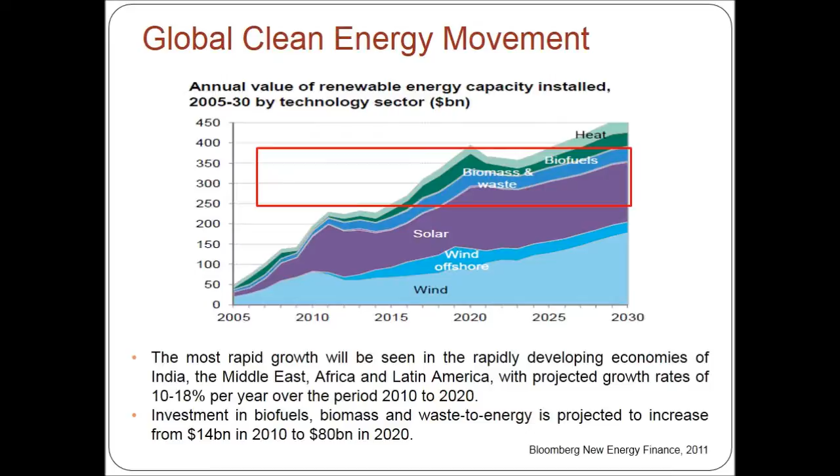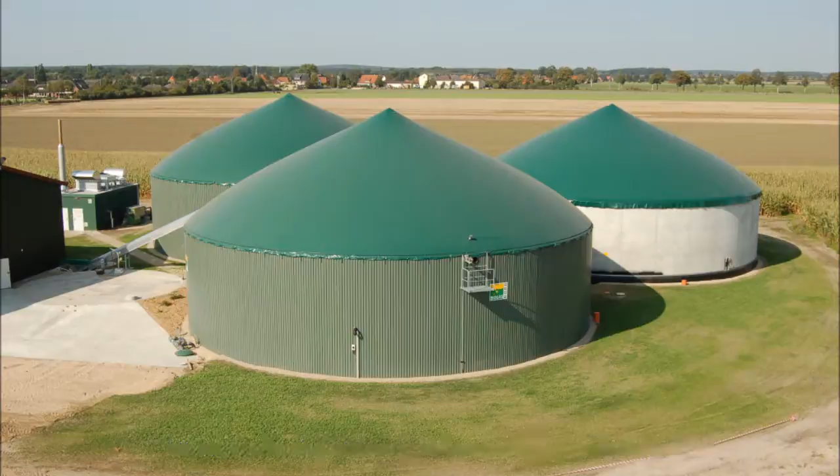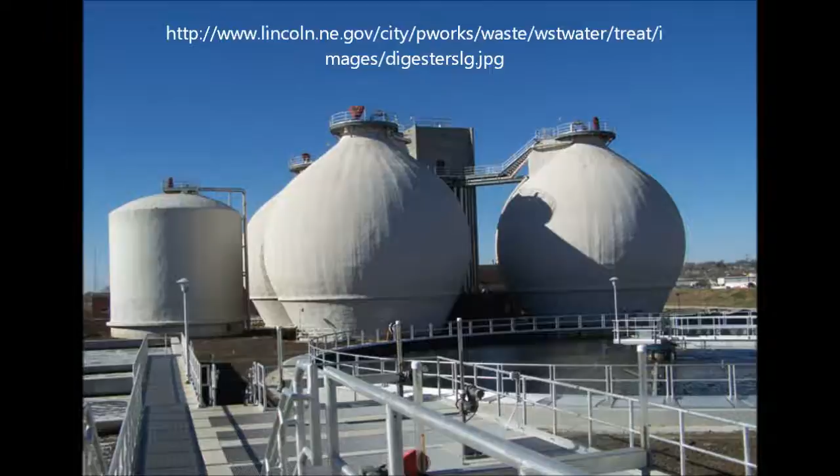The biological waste-to-energy technology known as anaerobic digestion is one of these clean energy technologies that has found success on many different scales, whether we range from small-scale systems on rural farms in the global north or even the global south, to even larger-scale centralized systems that are in process recovering resources from many different kinds of waste streams. But first, let's talk a little bit more about anaerobic digestion.

Anaerobic digestion is a process in which microorganisms stabilize and degrade organic material under anaerobic conditions. Biogas, stabilized biosolids, and liquid waste are the main byproducts of the process. Anaerobic digestion is a natural process that occurs in living things and in soils and sediments as microorganisms that favor anaerobic conditions degrade organic matter.

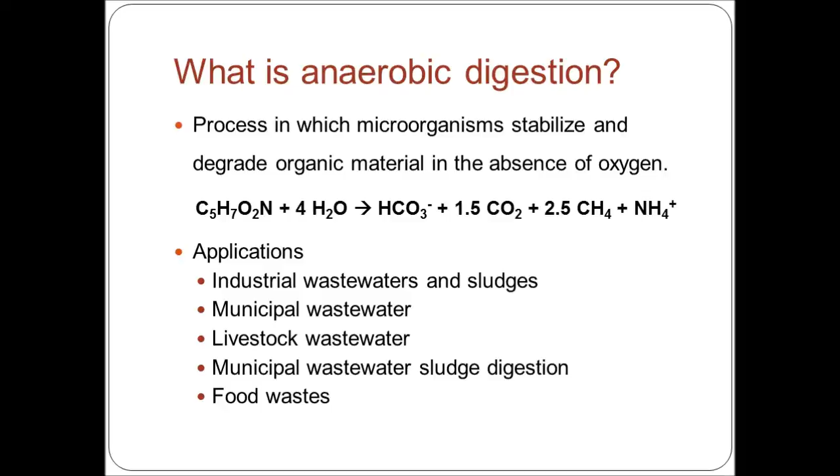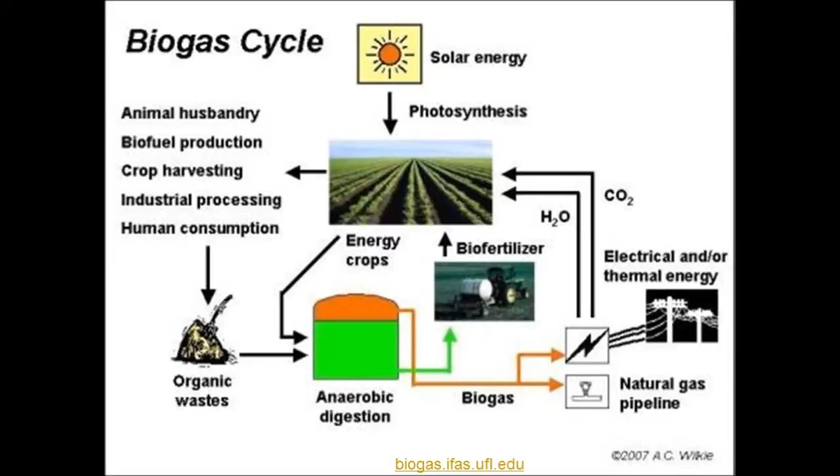Engineered anaerobic treatment processes can be used to treat industrial wastewater, municipal wastewater, livestock wastewater, and food waste. The biogas produced during anaerobic digestion can be transformed into electricity or distributed into the natural gas pipeline. The biosolids produced from the process can be used as a soil amendment, therefore contributing to the biogas cycle.

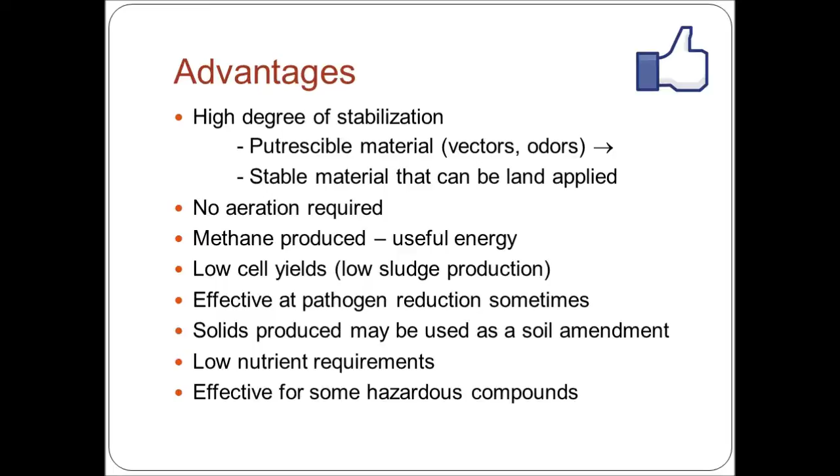Compared to other treatment processes such as aerobic treatment, anaerobic digestion produces a stabilized effluent that can be used as a soil amendment. Anaerobic digestion does not require aeration and thus reduces cost. This system produces energy and has low biomass production. In addition, anaerobic digestion microbes have low nutrient requirements and can effectively treat hazardous compounds.

Anaerobic digestion does, however, have some disadvantages. Anaerobic digestion requires different groups of microbes that require different temperatures, pH, and operating parameters. Methanogens, biogas-producing microbes, are sensitive and slow-growing. Corrosive gases such as hydrogen sulfide can also be formed, and the effluent needs further treatment due to production of ammonia.

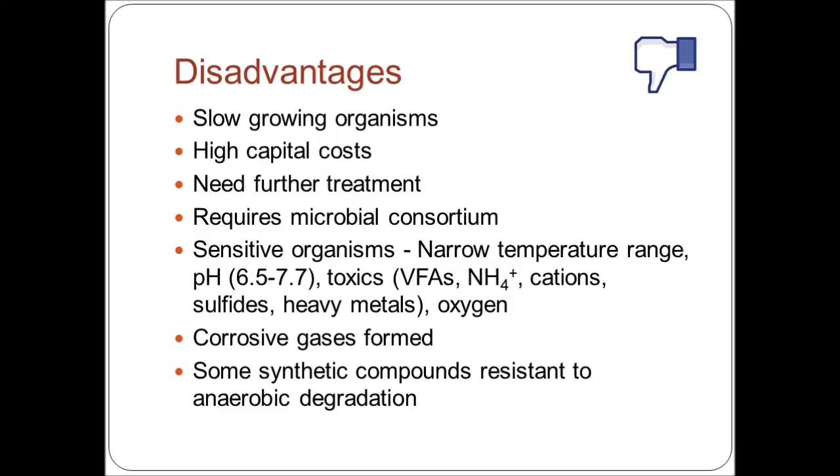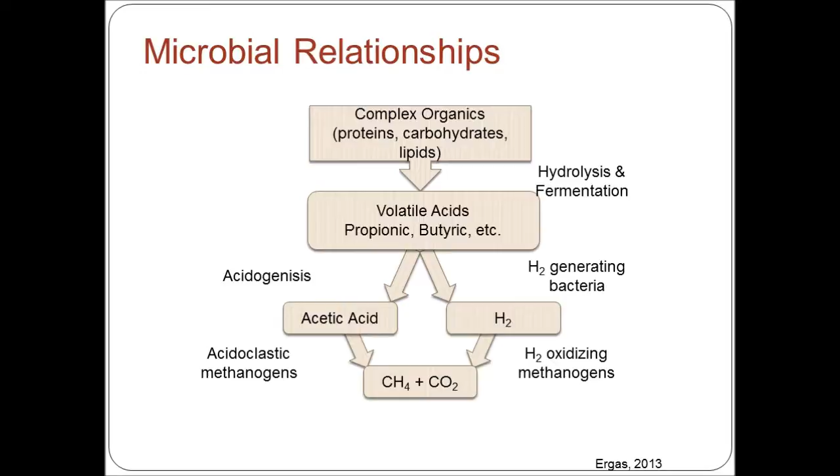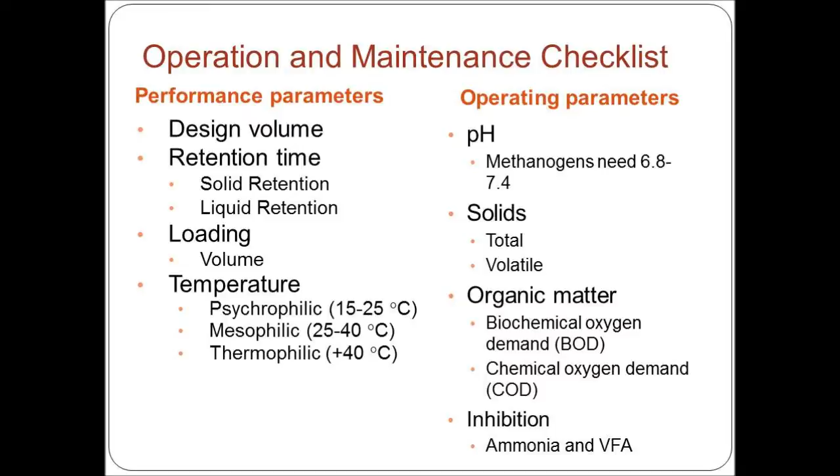Within the developed world context of anaerobic digestion systems, there are several scales that can be evaluated to better understand how anaerobic digestion works. Ideally, no matter the scale of your anaerobic digestion system, there are certain performance and operation parameters that are considered on all levels in order to ensure a well-functioning system. Here at the University of South Florida, we are operating both pilot scale and bench scale systems in order to understand how these anaerobic digesters function.

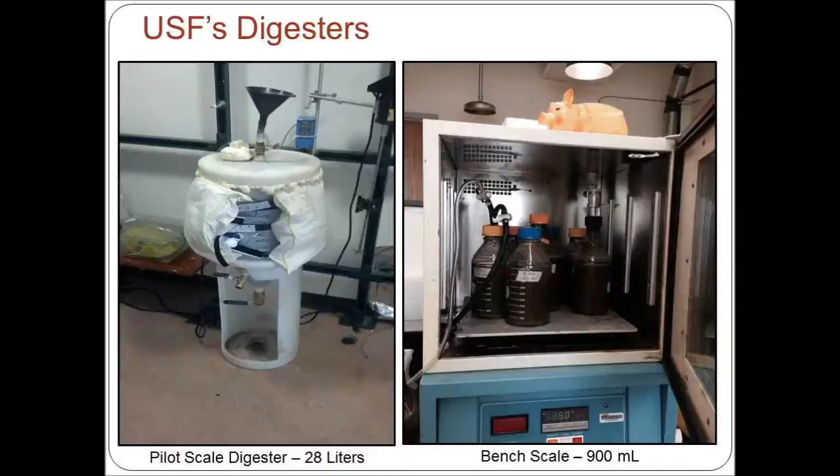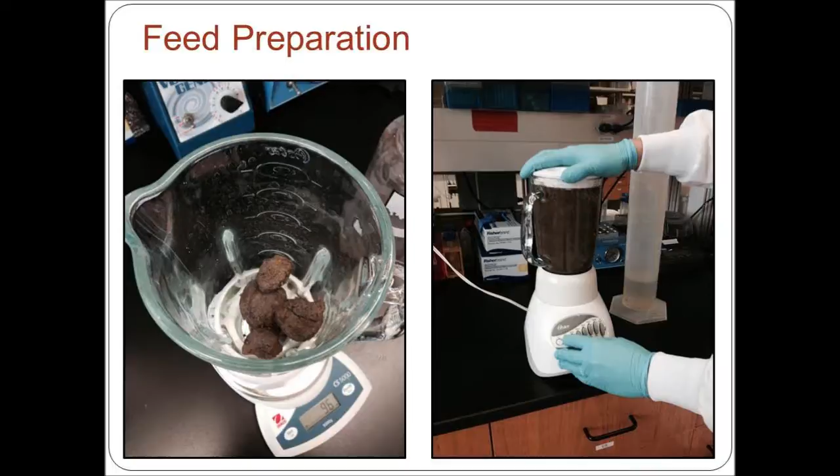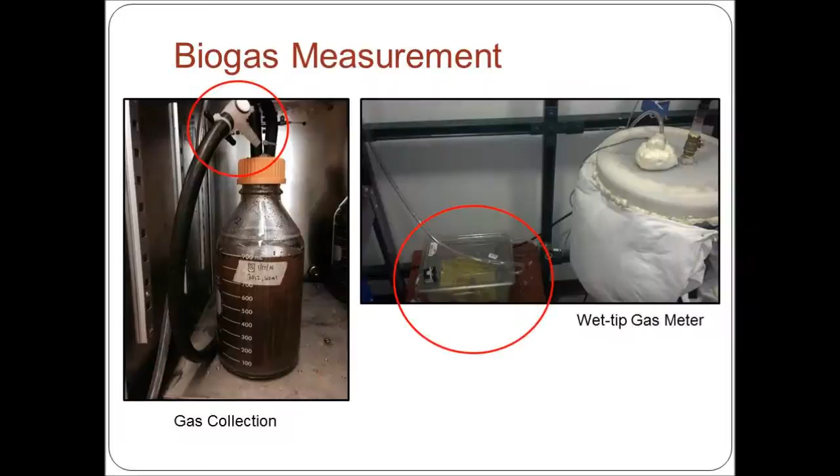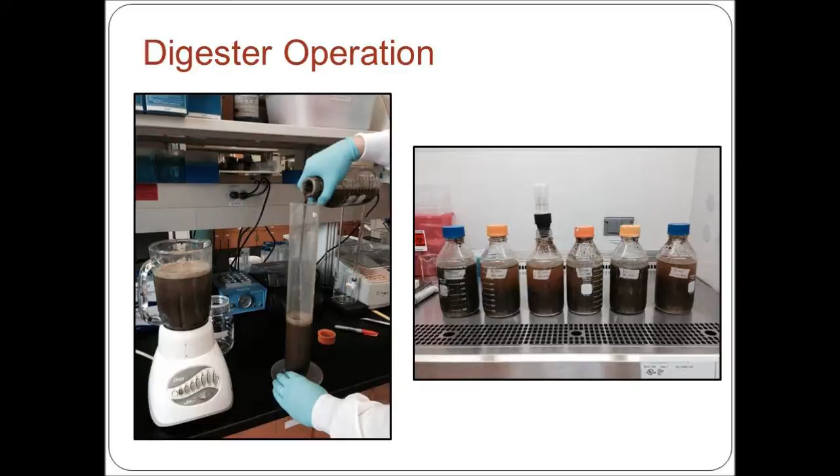There are several activities that are associated with the operation and maintenance of anaerobic digesters. The collection of waste is very important, as is the preparation of a consistent feed. Overall, numerous operational tests such as ammonia concentration, volatile fatty acid concentration, and the biogas production are often monitored to ensure well-functioning systems. On this small laboratory scale, a lot of attention is required in order to maintain these individual units. But let's see what happens when we look at the larger scale.

With the enlargement of the European Union, the accession countries are coming under pressure to develop and meet European Union standards for environmental protection and sustainable development. In this ongoing process, global economic liberalization, regulatory policy, conservation, and lifestyle issues are all involved, and creative solutions will have to be found. In addition, in the last decades, the goals of wastewater treatment have become ever more ambitious, and thus the technologies used are ever more sophisticated.

The result is that both the energy required for and consumed by the treatment processes has risen. Simultaneously, the minimization of energy consumption has become a major goal for wastewater treatment plant operators. Integrated water and energy systems have therefore become fundamental to social, economic, and environmental well-being and prosperity for both developing and developed world wastewater treatment systems.

Optimization of total energy consumption during wastewater treatment and application of anaerobic digestion technology have become essential in improving the energy balance in municipal wastewater treatment plants. Generally, the easiest way to increase biogas production and thus improve the energy balance of a wastewater treatment plant is to supply an external organic carbon source. However, this increases the cost of operation.

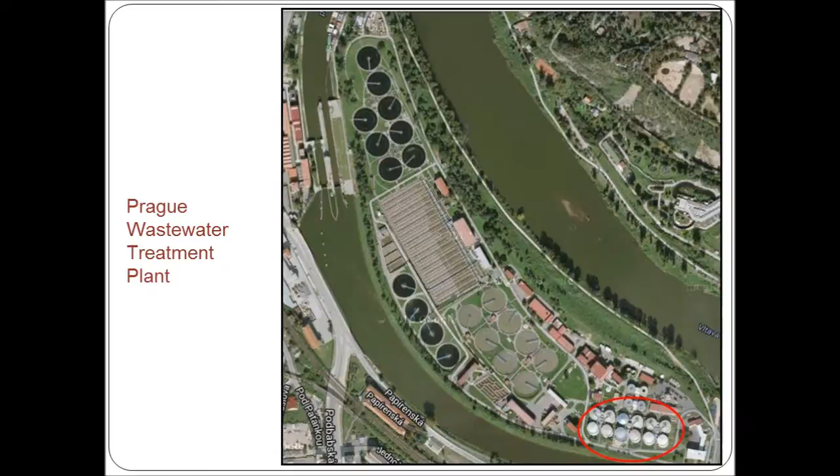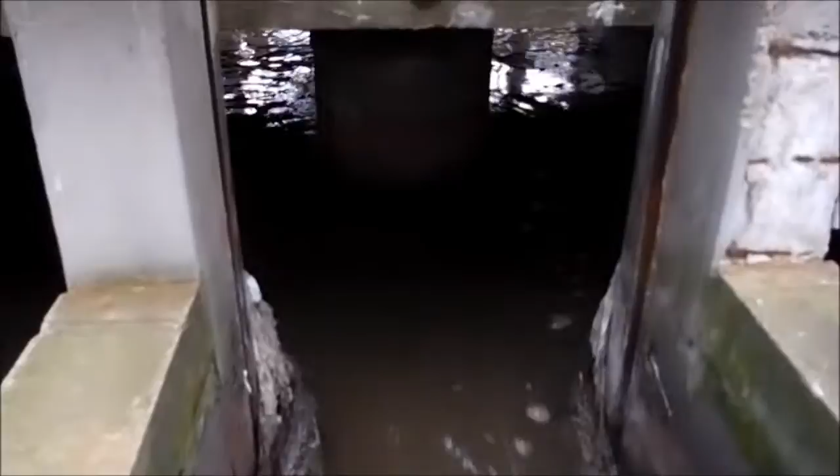Today, the plant's large treatment facilities consist of 12 anaerobic digesters. Each digester has an operational volume of 4,800 meters cubed, operated at a thermophilic temperature of 55 degrees Celsius with a solids retention time of 25 days. To intensify their energy production, the Prague wastewater treatment plant adds iron and aluminium salts at the beginning of the process to enhance removal of carbon, thus increasing biogas production.

The operators also thicken the wastewater influent to increase the loading rate and have an enhanced digester mixing system to improve contact between the substrate and anaerobic microorganisms. The enhanced anaerobic digestion treatment system produces 0.63 meters cubed of methane per meter cubed of digester volume per day. This is about 50% greater biogas production than what other typical municipal wastewater treatment plants achieve.

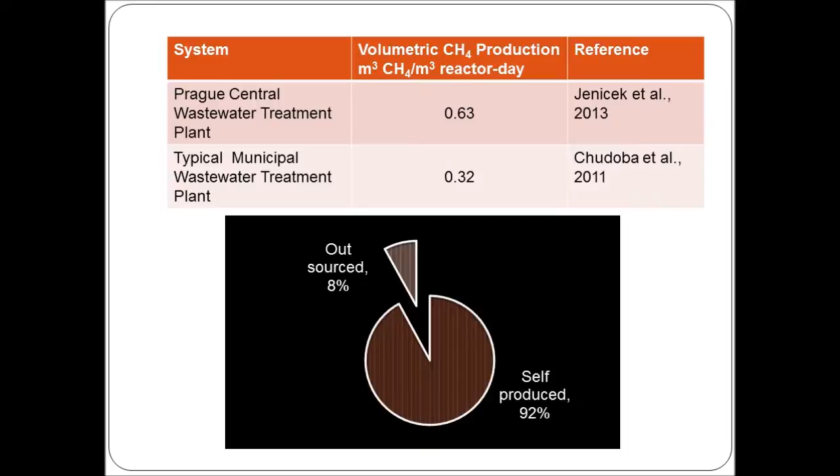Such an elevated level of biogas production is sufficient to cover a large part of the total energy demand of a wastewater treatment plant. In the specific case of Prague Central Wastewater Treatment Plant, the self-sufficiency rate could even be higher. However, due to the low capacity of the combined heat and power units, only 92% of the produced biogas is actually used to generate electricity.

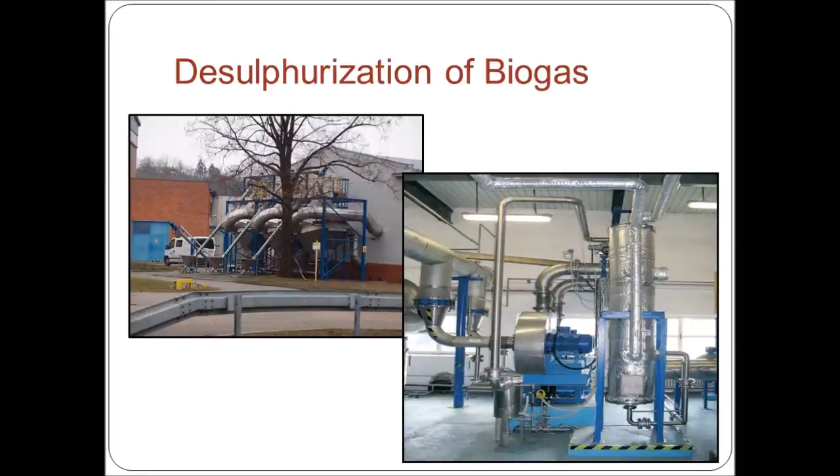Before the biogas is converted into electricity, removal of hydrogen sulfide to levels below 50 parts per million is often required for reasons of health, safety, environment, and corrosion of equipment such as gas engines, boilers, and piping. Desulfurization is also necessary when biogas is upgraded to natural gas quality and injected into a grid. For safety and during emergencies and maintenance, controlled burning of the biogas, flaring, is performed.

Biogas is about 60% methane, a clean burning fuel. However, methane is also a greenhouse gas. Therefore, in situations where capturing the gas is not possible, it is better from an air quality perspective to burn methane and convert it into carbon dioxide through a flare system rather than vent it directly into the atmosphere. This is because methane has a higher global warming potential compared to carbon dioxide.

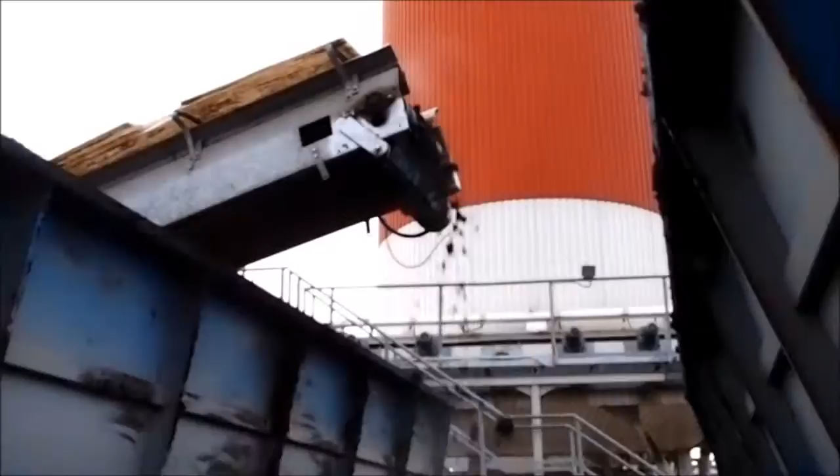Obviously, maximization of biogas and electricity production is a major task on the road to energy self-sufficiency. However, equally important is the utilization of nutrient-rich biosolids. About 50% of the biosolids produced at Prague's wastewater treatment plant are composted, 17% are land applied. The percent of land application has decreased due to concern of heavy metals and pathogen content in the biosolids. Biosolids of insufficient quality, about 13%, are sent to landfills.

We'll talk more about the safe use of the residual in a moment, but first, let's focus on developing world systems. When designing a small-scale system for the developing world, it is important to design a system that fits the needs of the community or household based on: 1. The type of waste being treated. 2. The volume of the digester. This will depend on the amount of waste being produced and the appropriate digester retention time.

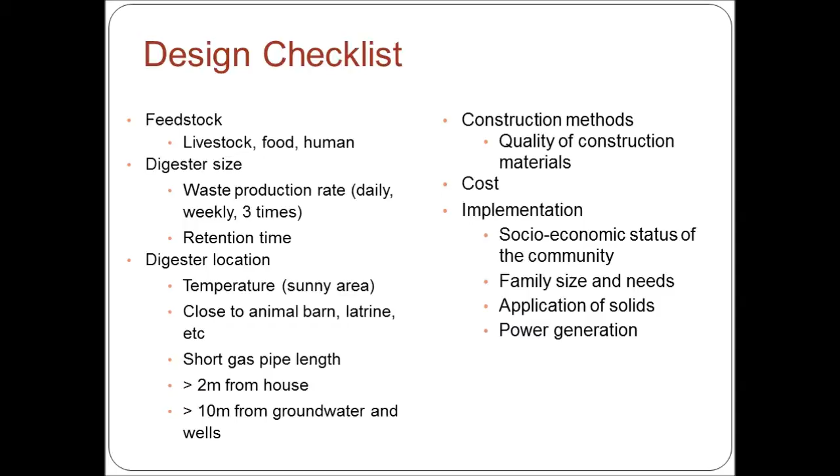3. The location of the digester to ensure that it is well heated, close to the waste production site, within reasonable distance to the house due to pipe length, and away from drinking water sources. 4. The quality of construction materials has to be considered to ensure durability of the system. And 5. Implementation, capital, and maintenance costs have to be considered.

There are 4 commonly used anaerobic digestion systems in the developing world. The fixed dome digester has 3 main sections. Section 1 is a tank where a mixture of waste and water is poured and flows through a pipe to Section 2, the fixed digester. As the anaerobic process occurs in the fixed digester, the biogas produced creates a pressure that pushes some of the treated waste into a third section, known as the biosolids overflow storage tank.

The biogas is stored within the fixed digester, which must be gas tight. A gas pipe is connected to a rigid gas storage tank to allow release of biogas when needed. This digester is low cost, saves space, and can last for up to 20 years.

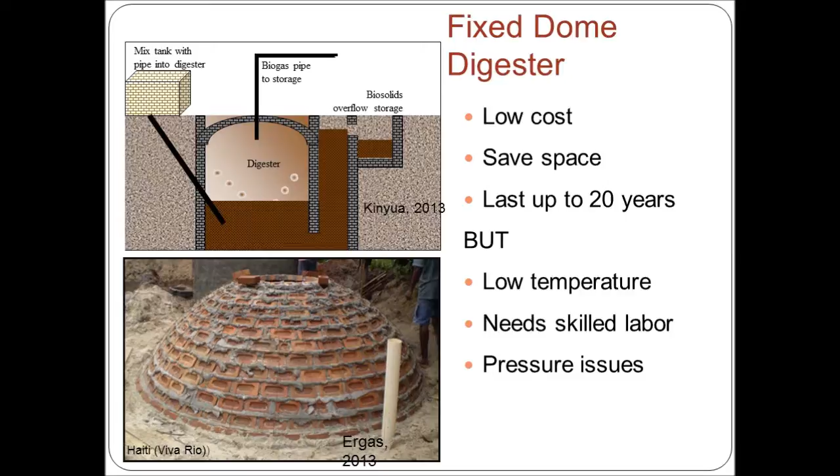However, due to its under-the-ground design, it has low temperature, needs skilled labor for maintenance and construction, and has pressure issues.

The design of the floating drum digester is very similar to the fixed dome digester, but has a moving gas storage tank. The floating drum is supported by a guiding frame, and the tank rises and falls depending on biogas production and use. The drum floats on top of the digesting slurry or on a water jacket. Materials such as plastic reinforced with fiberglass and high-density polyethylene can be used for constructing the drum.

Unlike the fixed dome digester, this digester has no pressure issues, does not require skilled labor, and is preferred by users because they can see the presence of biogas. However, the floating drum section adds cost and lasts for only 15 years due to corrosion from the biogas.

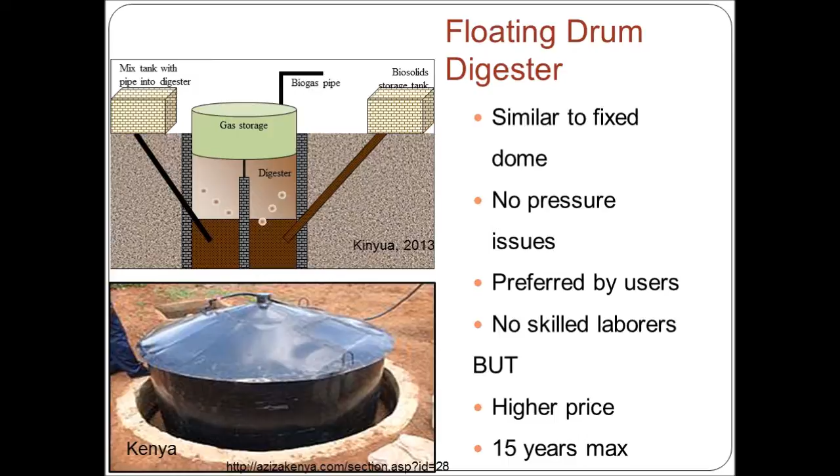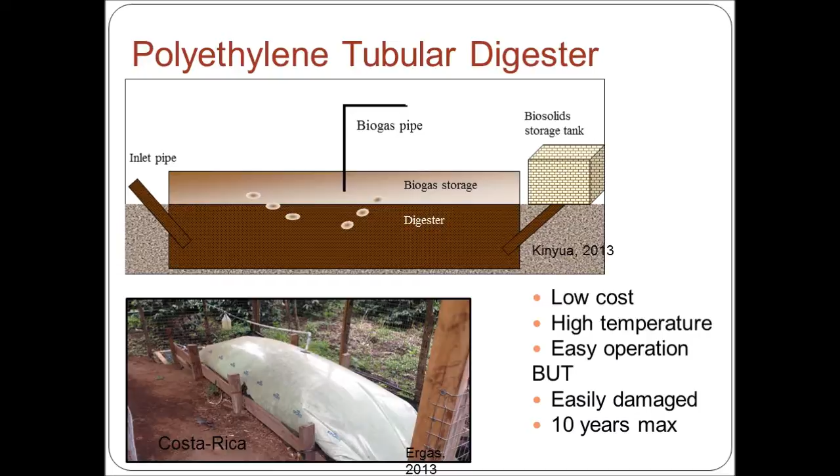Polyethylene tubular digesters, also known as balloon digesters, are constructed from semi-elastic plastic or rubber bags. Tubular digesters are placed in a 2 to 5% slope trench and operated much like a fixed dome digester with a separate biogas storage tank. They cost the least compared to the other digesters, are operated at high temperatures, but are easily damaged and last the shortest time.

The basic UASB process is designed to have the wastewater fed from the bottom of the reactor. The wastewater moves through a layer of granular sludge, also known as the sludge blanket, where microorganisms carry out biodegradation. The effluent is released from the sides at the top, while the biogas is collected in a special gas collector at the middle.

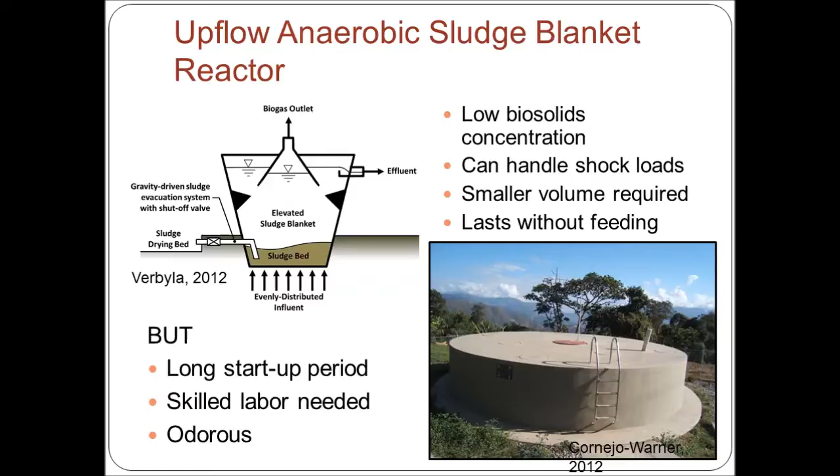These systems produce low biosolids concentrations, can handle shock loads, require smaller volume, and can last for a long time without feeding. However, they take the longest time to set up due to the creation of the sludge blanket, may require skilled labor, and can be odorous. The most common use for biogas in the small-scale developing world systems is for cooking.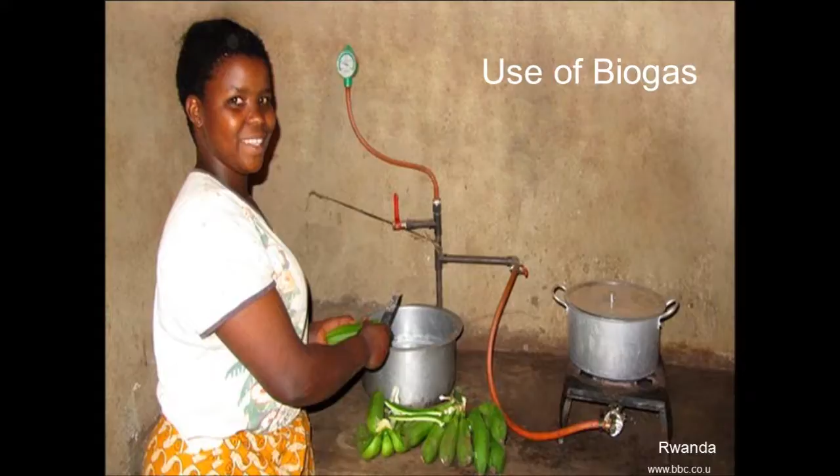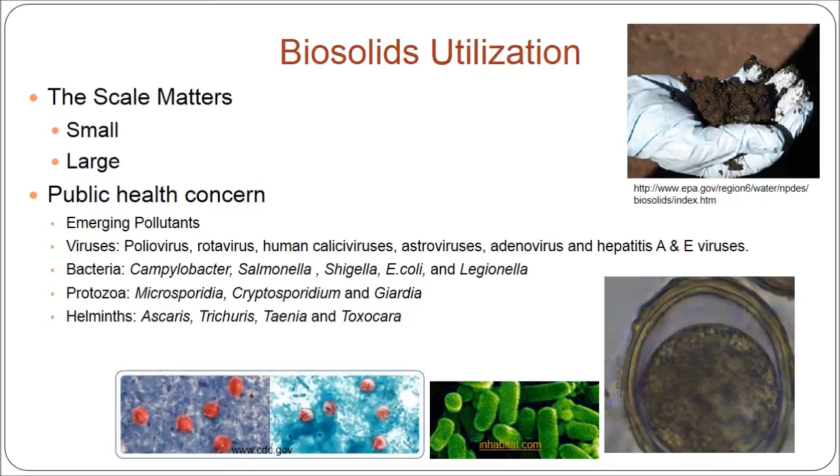Besides biogas, the other recovered resource from anaerobic digestion is the sludge portion. In large-scale applications, this material is generally heat or chemically treated to produce residual that can be land applied as a soil amendment. This heat treatment is very effective at stabilizing the sludge and often removes problematic constituents like pathogens. However, in case of small-scale systems, the process of stabilization and disinfection must occur entirely within the digester, as further processing is often not employed.

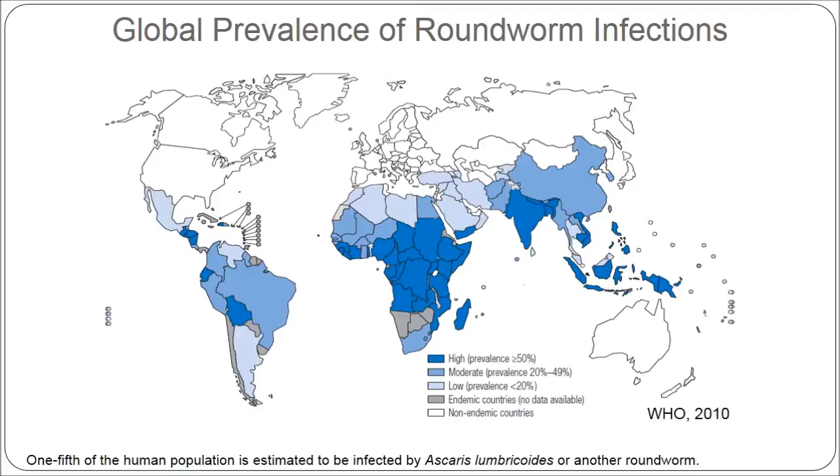This figure represents the global prevalence of roundworm infections, most of which are occurring within the tropical regions of the planet. Roundworms are interesting because their eggs have been shown to be able to survive for lengthy periods in anaerobic digestion environments. So it brings to question whether small-scale waste-to-energy systems that are installed in these high-prevalence regions are actually producing a safe residual, or are they exacerbating the risk of infection? Let's take a look at how this could happen.

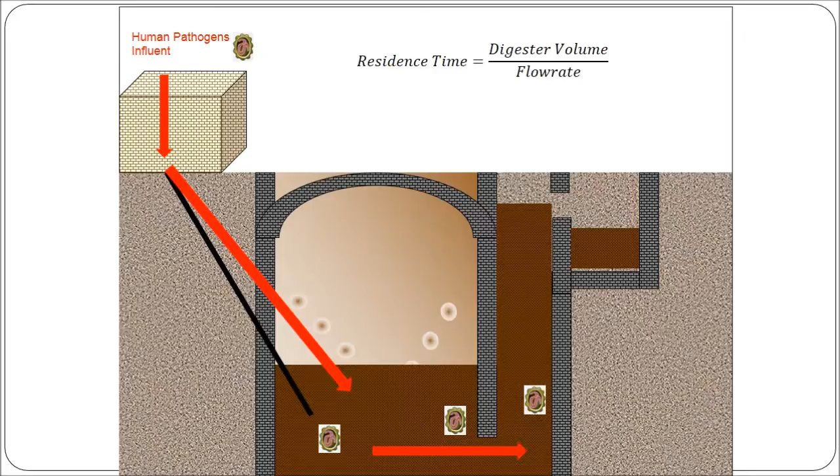As animal or human waste containing roundworm eggs is deposited into the digester, they spend a certain amount of residence time within the digester. This time is based upon the ratio of digester volume to the volumetric flow rate of waste coming in. During the residence time in the digester, the egg will be exposed to reactor conditions that are proven to be not very good at destroying this particular parasite. If the combination of temperature and time is not sufficient, the still viable egg will be pushed out in the residual as the digester is continually fed.

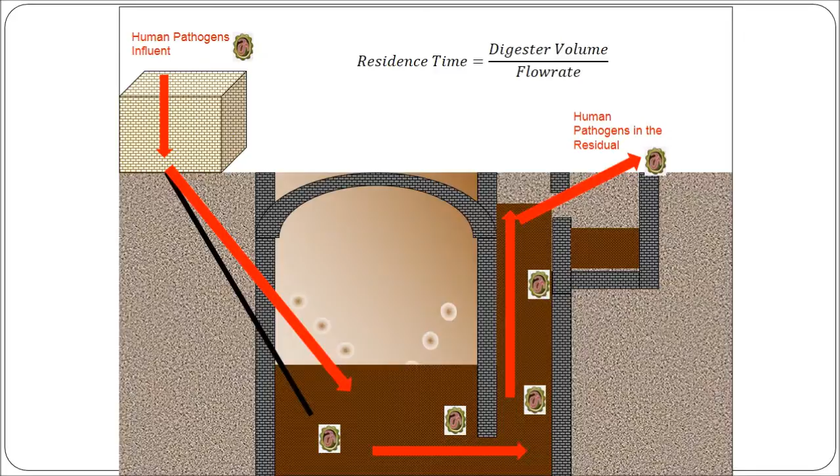Since the residual is promoted as a fertilizer, this infectious blend of solids is vectored right back to the owner through multiple pathways. This situation could be worsened if the system is not maintained, allowing sludge to build up inside the reactor, which reduces the volume and in turn the residence time.

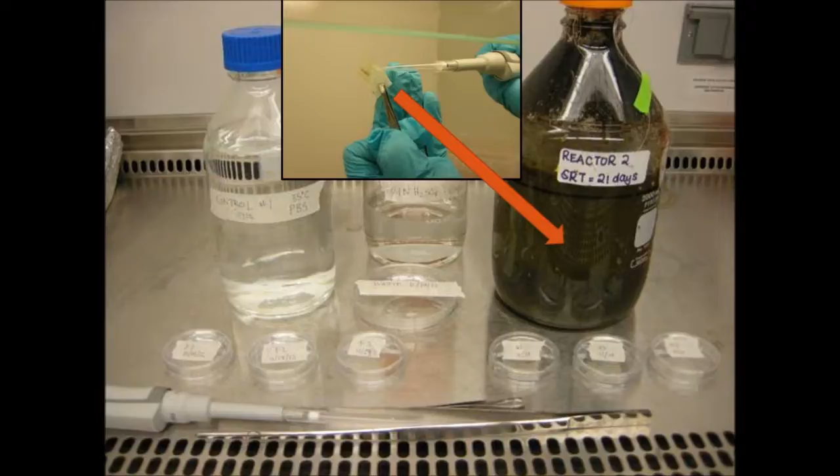Here, at the University of South Florida, we are taking roundworm eggs and exposing them to common anaerobic digestion environments to better understand their fate in these systems. Through the use of microscopes, we're able to determine when the egg transitions from a viable to a non-viable state. We can then use this information to design anaerobic digestion systems to be more culturally appropriate.

Ultimately, anaerobic digestion is a good, clean energy option because it can accomplish many of the priorities in a waste management strategy,